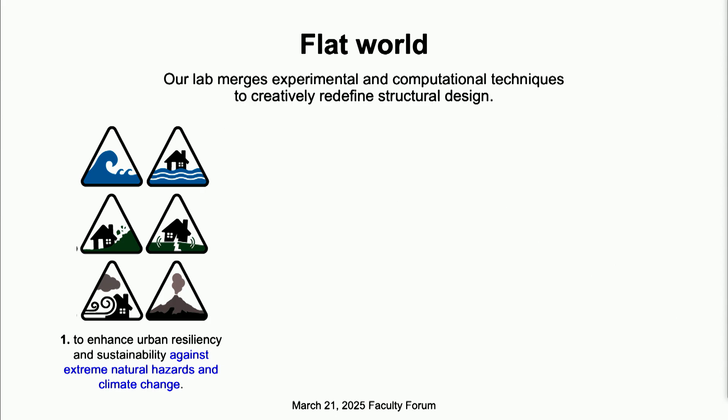And so if you look at the research that I do, when I think about a flat world, I think about how we globally need to address more and more extreme natural hazards and climate change. I think about how our students need to become very comfortable with practical, sustainable, and more resilient technologies. And then this last piece, I think, is actually incredibly critical, and it is that to really solve complex problems, we can't do them by ourselves anymore. And so we really need to borrow and transfer ideas from other knowledge domains, and we as a community also need to value collaboration, knowledge exchange, and diverse experiences.

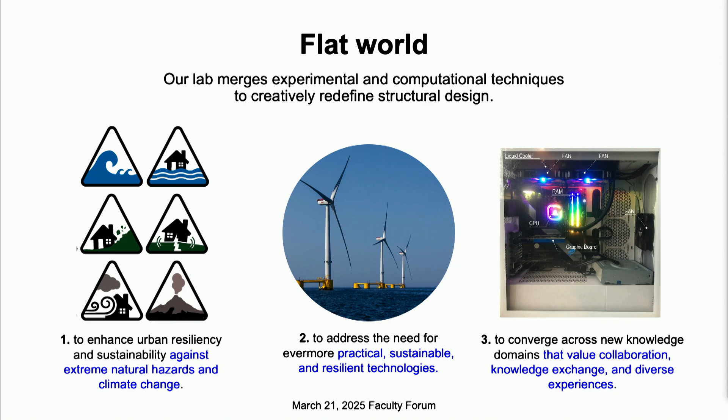And so I sort of set up my talk based on those three things, keeping in mind the motivation in a flat world. And I can't talk to you about all my projects, so I've just chosen a few. So let's start with that first one, which is this idea of globally addressing climate change as well as natural hazards through our built environment, which is really where we live and work. It has a huge impact on our community.

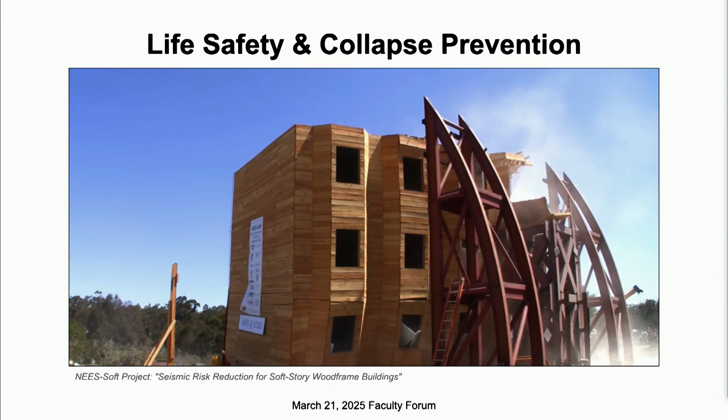And to give you an example, traditionally, when we design buildings, we design them for life safety and collapse prevention. But that's really not enough. And a good example of why that's not enough is when you look at it in terms of a community and how it's resilient to natural hazards. So this is after the 2010 to 2011 Christchurch earthquake sequence in New Zealand. And these buildings did not experience collapse like you saw in the previous video. In fact, they were designed as intended, which is to mitigate collapse and protect its occupants.

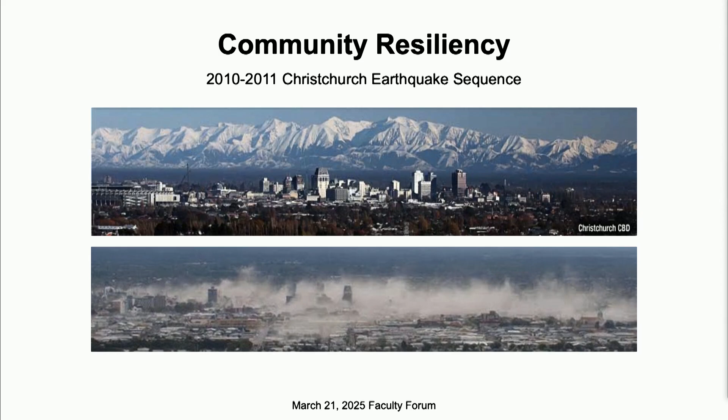And this is about 10 years later when I was there in 2018. And you can see that although they protected the occupants, the majority of the building stock was torn down. This has a huge repercussion when it comes to the community, and Christchurch still hasn't recovered, and it's now 15 or so years later. And so a huge part of structural engineering and a huge effort by our community is to think a bigger picture than just damage and collapse and start thinking about what those community metrics might mean so that we can ultimately make more value-informed and cost-informed decisions about how we build and how we design.

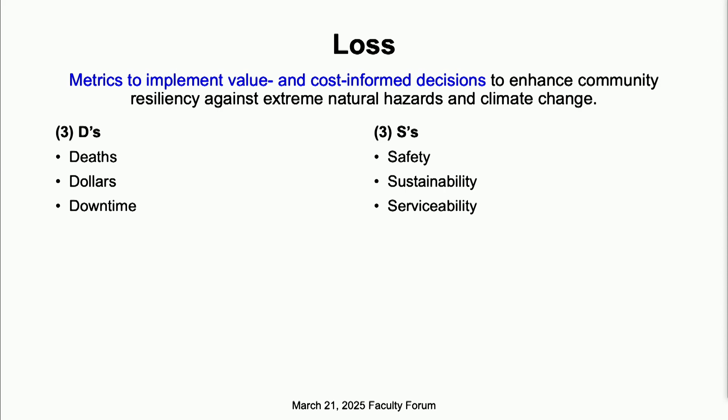And so typically, this has been in terms of 3Ds, death, dollars, downtime, but apparently that was too negative. So more recently, it's been thought of in terms of the 3 S's, which is safety, sustainability, and serviceability, which is kind of interesting. But really, it's what happens if you, as the building owner, have a building that is damaged, and how much damage are you willing to handle in terms of downtime, initial upfront costs, but also post-event repair costs. Potentially you think about carbon impact, and then that casualties and unsafe placarding is still in there, but it's mixed with a whole bunch of other metrics.

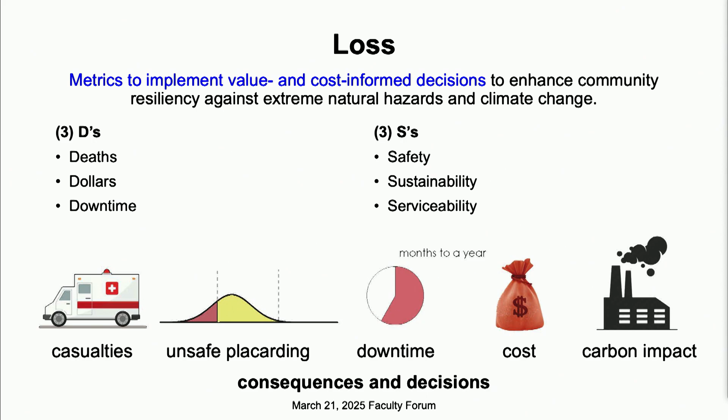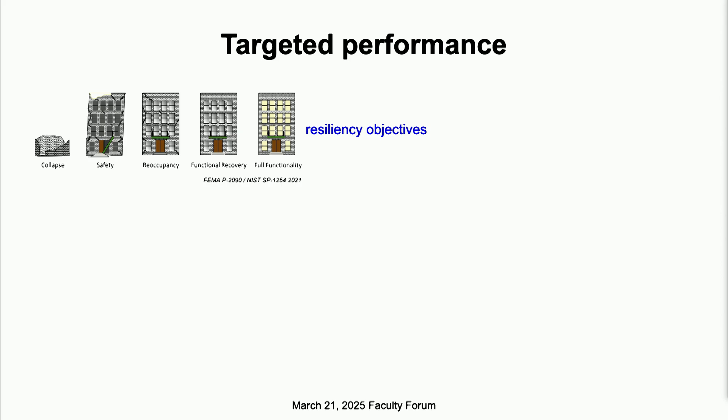And so how my group has started to think about this is, well, now you have multiple objectives, and you might want to meet ones or others depending on what performance you want for your system. And so potentially you might have resiliency objectives that are associated with what happens after an extreme event. So perhaps for a very, very rare event, if you're Apple or Google, you actually don't want to shut down. Or perhaps if you're an educational facility or a hospital, the community can't afford to have you shut down. So those are what we're going to call resiliency objectives.

And then perhaps you also have sustainability objectives that go into the materials and how you actually build and construct the initial building itself. It could also go into what happens in terms of post-event repairs. But if you're going to design for all of these objectives, perhaps what you also need is a new building system. And so what my group thinks a lot about is how do you start mix and matching traditional building materials and components so that the designer and the building owner can actually target the performance of their building based on what they want, based on multiple selection criteria.

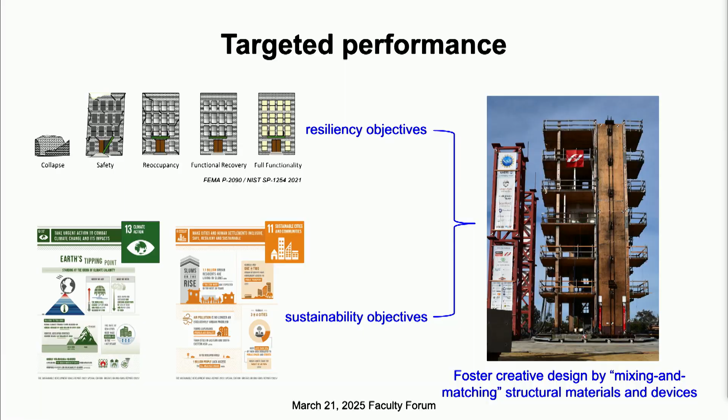So what you see on the right there is a 10-story building that we tested in January last year. The largest shake table in the United States is at UC San Diego. And so my group designed and built this sort of first-of-its-kind building. We shook it 23 times with earthquakes that are pretty severe. And this building was totally reoccupiable after the event. So very minimal damage, very superficial. And so that's part of the work my team does.

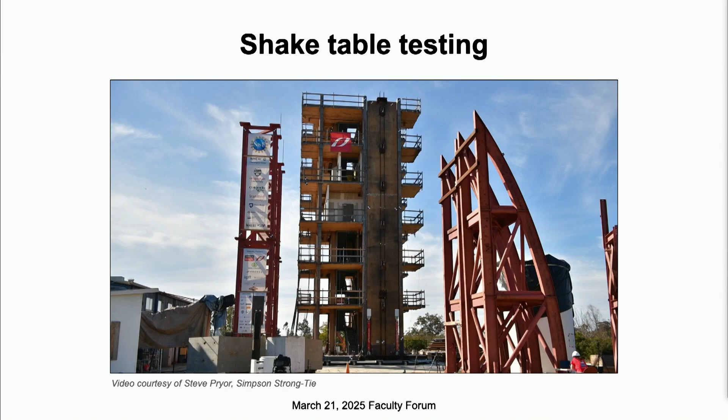But let's look at this second piece, which is sort of looking at technology. And to do this, we've sort of rethought traditional structural engineering, which is mostly focused on urban environments, and looked more at mechanical type systems associated with renewable energy devices. And so this is a little bit outdated, but I think drives an important point home. So natural disasters are disasters that by definition have an extreme impact on communities. And so in 2023, 399 events were labeled as disasters. And if you look at that number, it's 369 over a 20-year span from 2003 to 2022.

What's really interesting about it is you see the wildfire there. That was actually the fire in Hawaii. That was one of the top 10 most expensive disasters, mostly because it was in the United States. And then the earthquake there, that was the one associated with the most number of casualties in 2023. That was the earthquake in Turkey. The big blue dots are associated with events related to climate change.

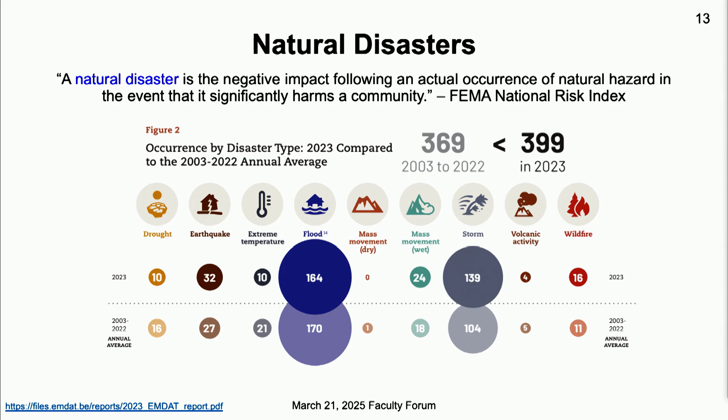So my group, what we've been thinking a lot about is how do we expand not just on natural disasters, but also thinking about climate change itself. And so, again, we're structural engineers, so we focus on things that have mechanical type behavior that we're very familiar with from the built environment. And so we've been doing a lot of work on marine energy devices. And these are very interesting devices because they promise some mitigation measure against climate change. But the issue with them is that they're extremely difficult systems to simulate. There's a lot of multi-physical phenomena that are happening that affect these wind turbines.

And if you're building off the Pacific coast of the United States, the water is actually fairly deep, and so they have to be floating. And so you need to be able to simulate not only dynamics associated with the rotor moving, but also aerodynamics associated with the wind, the structure itself, the hydrodynamics of a floating system, as well as mooring lines that could be anywhere from 1,000 to 2,000 meters deep, and the associated anchorage and soil structure effects associated with them. And these are all typically thought of as different knowledge domains. So there's not a single person who usually does all of these at once.

I think the worst part about this is not so much the multi-dynamical nature of these systems, but that they're so incredibly large. So these will be the largest rotating machines ever constructed, and they are going to be floating in the Pacific Ocean.

And so, this is just an example. This is probably about a 1 megawatt device. So the expectation is that California will be building 10 megawatt devices. Those are the size of the Eiffel Tower. So incredibly large devices, and that, coupled with the multi-physics nature of them, makes them very, very hard to simulate in terms of controlled laboratory testing environments.

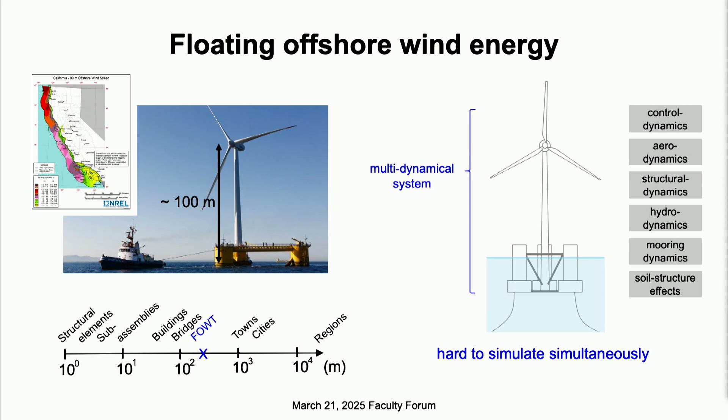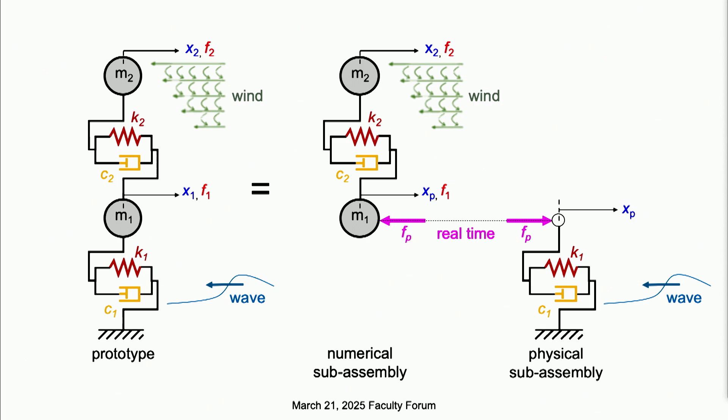And so what my group has sought to do is, well, what if we could sort of separate out the physics and study a portion of it numerically, and a portion of it physically in an experimental setting. And so what we do is we take a system and we break it up into pieces where we're able to house and partition the domain depending on the governing equations that we're interested in. And then we use actuators and sensors that actually inform the numerical model and the physical model in real time.

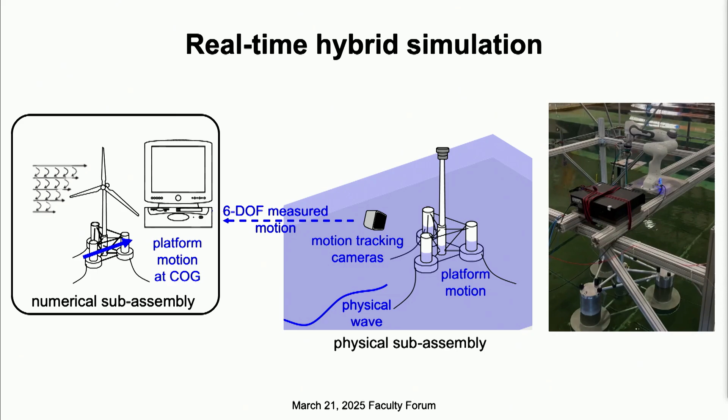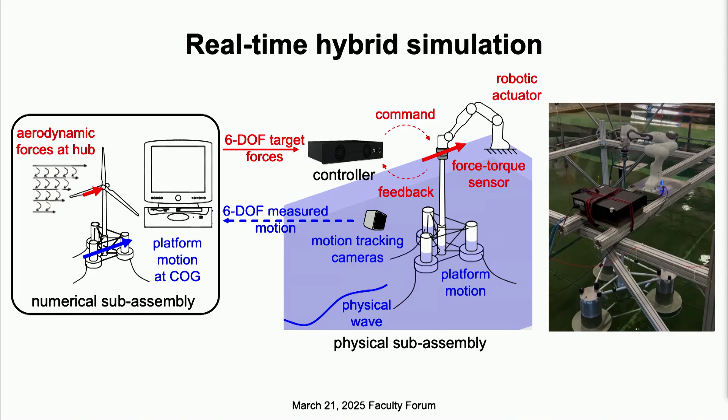And so this is what that looks like. So we would have a numerical model, say, of the wind that's interacting with a physical small-scale experiment of the wind turbine in a wave basin. We have a motion tracking system that monitors the motion and feeds that to update the wind loading. And then we have a 6 degree of freedom robotic manipulator that then applies that force resulting from the numerical model in the wave basin itself. And so by doing this, we can sort of separate out the different physics, but then we can also get the interacting component.

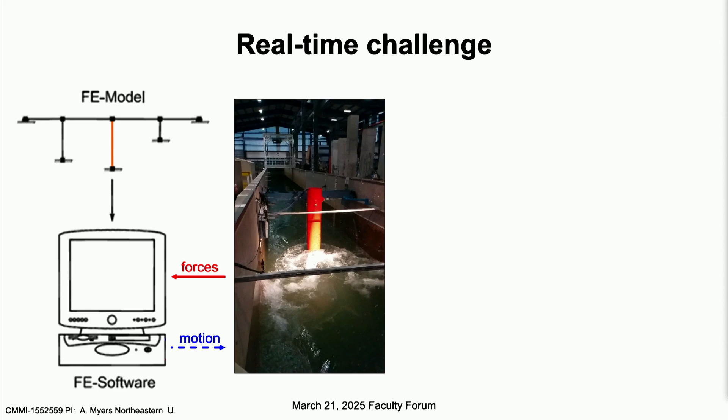And so some of you might have looked at that and been like, that looks really hard. And it really is. There's a number of complexities to it. One is just the diversity of the different domains that you need to have involved. But another is the fact that it has to be in real time. So as much as I would love to slow down the fluid flow, I actually have to have my actuation and numerical models keep up with what's happening in the physical experiment.

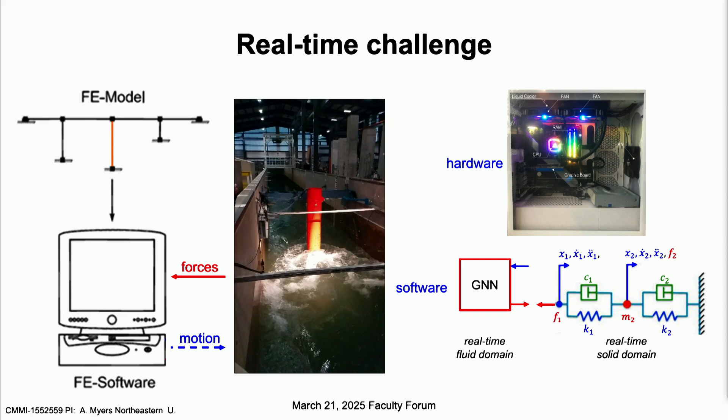And so my team develops a lot of different hardware architectures, including fiber optic communication and shared memory networks, as well as different softwares to reduce the computational time of the numerical model and different algorithms associated with that. And so that lower right-hand picture is actually what we got funded for as part of the discovery grant process. And so this is sort of a very technical challenge that feeds into that third point I was making about converging across different disciplines and borrowing different ideas from other fields in order to tackle the ones in our field.

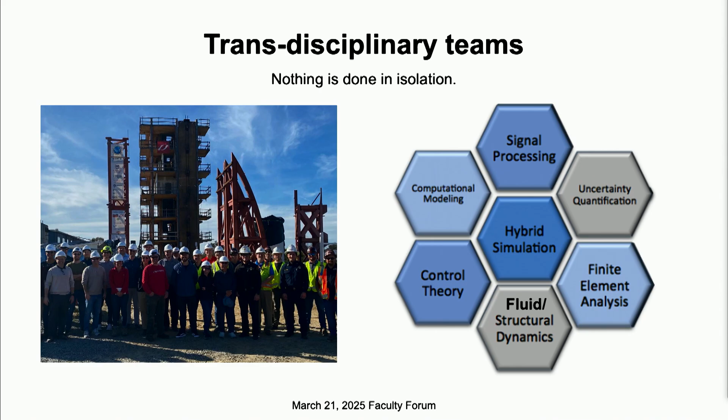But I think this is actually much bigger than just thinking about it technically, and that's that if we're really going to tackle these really massive and very complex problems, we need more people, and it needs to be incredibly collaborative. So the mass timber building and the 6-story testing that I just showed was a huge team of students and researchers as well as practitioners. This is only half the team that was involved in that project, and that project wouldn't have been possible without this many people. And then if you think about doing these interdisciplinary type settings, the number of expertise involved makes that team ever more critical.